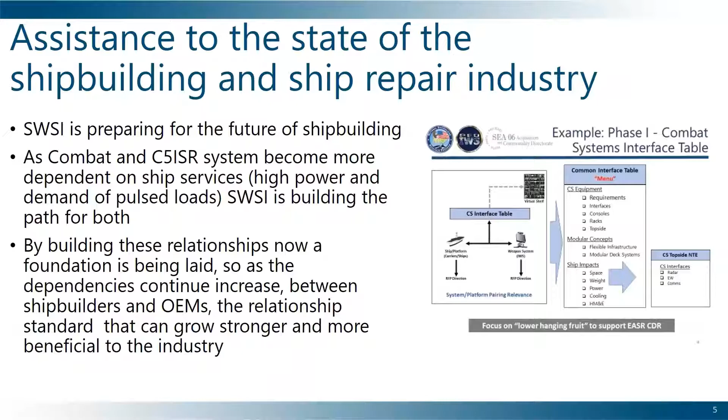So if we can make small changes early in the process that will have big payoff and pay big dividends in the end, that's a win-win for all of us. So we're building these relationships with the OEMs and the shipyards so that as these ties get stronger and the requirements get greater, that we're ready to go and we've created a pathway for this relationship to grow.

Since SWSI was started about 5 years or so, we've completed about 14 projects, and we currently have 3 that are in progress of being completed. The majority of those projects have been focused on physical interfaces. That's one of the challenges we have in shipbuilding: bolt patterns, foundations, and things like that. So we focused on how do we simplify and help lower the cost.

One of the things we've done is help transition technology that was part of the Ford class, and it's currently being installed on LHA and LPD. A lot of that is called flexible infrastructure. A lot of work was done in NSRP to allow that transition to happen.

Currently we're working a project called POA, or Physical Open Architecture, which is looking at a common rack system that is currently installed on the Ford class. We're looking at how we can extend the requirements from what's on the Ford into DDGs and CGs and other surface combatants. That's given us an opportunity to look at how we might be able to use that capability to install it on amphibs.

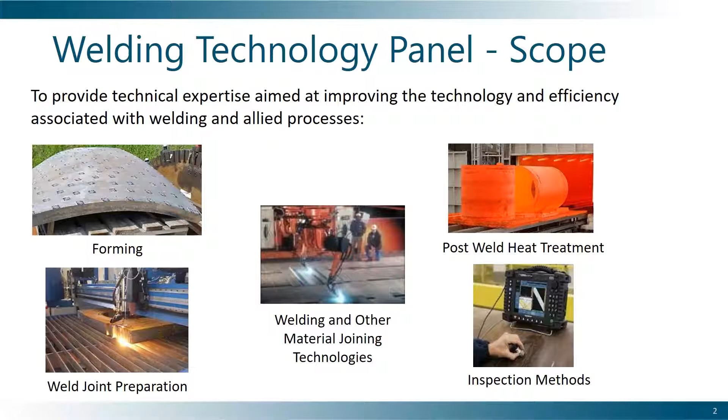When you boil it down to its basics, our mission is to improve welding. Most people, when they think about welding, focus on the actual process itself. But our panel takes a broader view. In addition to the welding process itself, our efforts and interests encompass all of the allied processes, including, but not limited to, those processes that shape and prepare the material, like forming, cutting, and cleaning operations, as well as those processes utilized after the welding is complete, like post-weld heat treatment and inspection methods.

The central focus of our panel is the development, selection, and execution of research and development. However, let me be clear on this point. Our panel consists of welding technical folks involved in building and repairing ships. We are not interested in R&D simply for the sake of R&D. We are looking for projects that have the strong potential to be implemented in our industry.

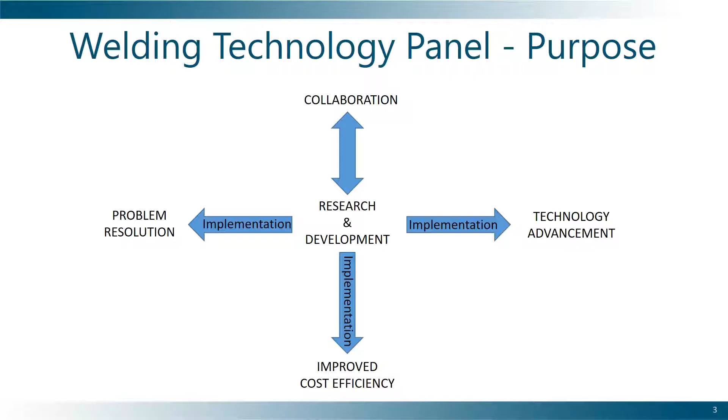The overarching and critically essential tool for accomplishing this is through excellent and frequent collaboration. I am both proud and grateful for the opportunity to work closely with welding subject matter experts from all spectrums of the shipbuilding and repair industry. The forum that the welding panel provides for this collaboration ensures that research and development projects that are identified, developed, selected, and executed are aimed squarely at resolving welding challenges, particularly those that are common to many of us, at advancing the technology of an industry that has a lot of room for exciting growth.

And finally, improving the cost efficiency of a key but expensive manufacturing process for shipbuilding and repair. So how does the work of the welding technology panel benefit the Navy, as well as the shipbuilding and ship repair industry in general? First, I come back to that concept of collaboration. This time, I capitalized, underlined, and bolded it to stress its benefit. While this one is hard to quantify, do not underestimate its value. What other avenue brings together in one place the welding SMEs from across shipbuilding and repair, supporting industries, academia, and the NAVSEA technical community? The Welding Technology Panel provides an excellent forum for collaboration that opens the door for brainstorming and discussing project ideas that address real-world issues that are common among many of us. Collaboration that fosters professional connections and relationships and the exchange of information. Someone we can pick up the phone and call when we have a question or a problem.

The second point I want to make as to how the Welding Technology Panel benefits the Navy is relative to the advancement of technology and implementation. The overall benefits in terms of implementation can't typically be measured one project at a time. That's because advancing the technology of welding is hard. It's challenging and time-consuming. Additionally, the capital investments for implementation are oftentimes significant. That being said, there are numerous welding technologies that are in common use today that we take for granted. But in reality, the Welding Technology Panel played a part in bringing these technologies to fruition.

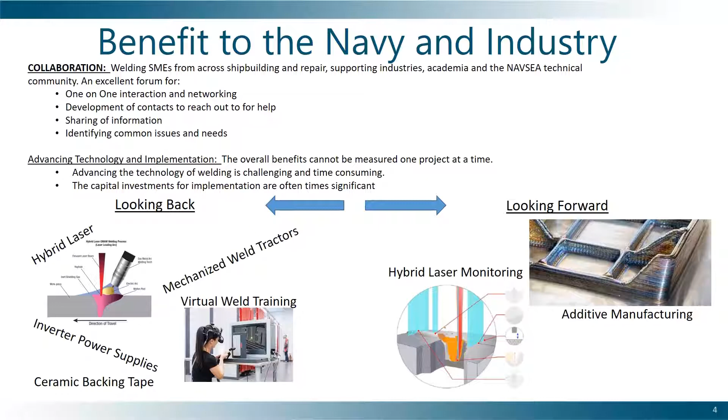For example, we recently completed a project looking at a high deposition welding process for additive manufacturing of large parts. We are also working on a couple of projects on hybrid laser arc welding that will further enhance and expand that technology. Okay, now let's get down to the nitty-gritty of what the Welding Technology Panel has been up to

since we were in Charleston a couple years ago. We completed a project on high deposition robotic additive manufacturing. This project utilized the tandem gas metal arc welding process, which offers maximum productivity, a 2 to 3 time increase in weld speed and deposition rate for building large shapes.

We also completed a project on high penetration dynamic buried arc welding, which is a variation in the GMAW process that results in deeper penetration and enables the completion of a 3/4 inch thick plate in a single pass. This process could realize up to an 80% savings over traditional welding methods.

The third project we completed was the development of a weld sequencing modeling software interface, which simplifies the distortion analysis for large structures and thus enabling the optimization of weld sequencing to minimize distortion. The savings in non-value added labor to correct distortion is estimated at up to 30%.

We are also currently winding down work on 3 other projects. A project on deep penetration hybrid laser, which couples the hybrid laser with the tandem gas metal arc welding process to expand the thickness range of hybrid laser systems up to 1 inch. This obviously increases welding throughput and minimizes distortion.

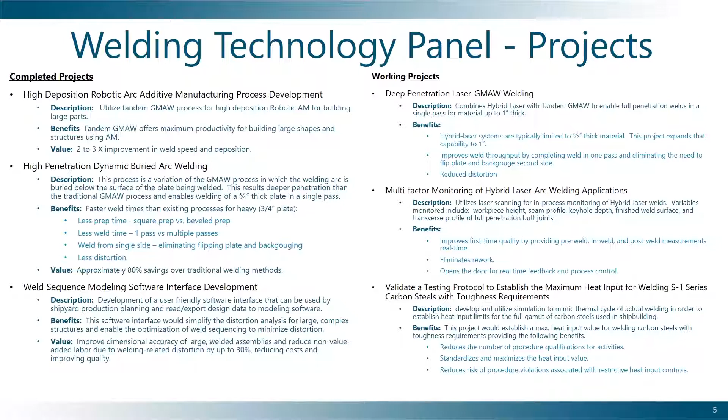Finally, the last project is a testing protocol to establish heat input limits on S1 carbon steels. This project is using a thermomechanical simulator to mimic the thermal cycle of a weld. Using a simulator in lieu of the traditional means of welding test plates significantly shortens the test time and will enable evaluating many grades of carbon steel and develop a maximum allowable heat input. This could eliminate the need for onerous welding procedure qualifications both for the shipyards and their suppliers.

The Welding Technology Panel meets twice a year. Our agenda typically consists of a day and a half of technical presentations, accompanied by a half-day tour. In August of 2019, we had an excellent joint panel meeting with Workforce Development at Lincoln Electric in Cleveland, Ohio. As many members of the welding panel sat in the Indian Stadium one evening that week, eating 25-cent hot dogs and drinking beer, none of us envisioned what 2020 had in store.

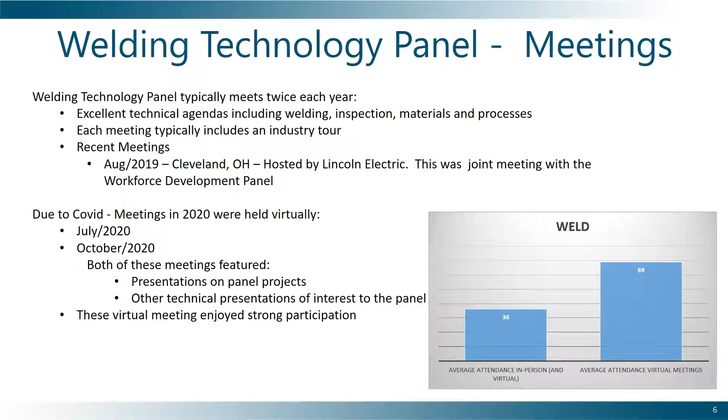As far as future activities are concerned, funding constraints will impact face-to-face meetings. That being said, given how much I've emphasized the importance of collaboration, I've been meeting with my panel leadership to discuss viable options to keep the panel marching forward and interest strong.

Some of the ideas we are considering include continuing to hold virtual meetings. As COVID has taught us in 2020, virtual meetings can be effectively held. We are looking at changing the content of these meetings going forward, focusing on specific topics of interest and crafting an agenda with strong technical presentations in line with that particular topic.

We are also looking at the possibility of holding a face-to-face meeting in the fall at no cost to NSRP. Finally, we plan to encourage panel members to participate in other welding events and conferences. For example, in October of this year, there will be an AWS shipbuilding conference in San Diego. If enough panel members show up, we may be able to have an impromptu meeting, maybe even accompanied with a few cold beers, minus the hot dogs.

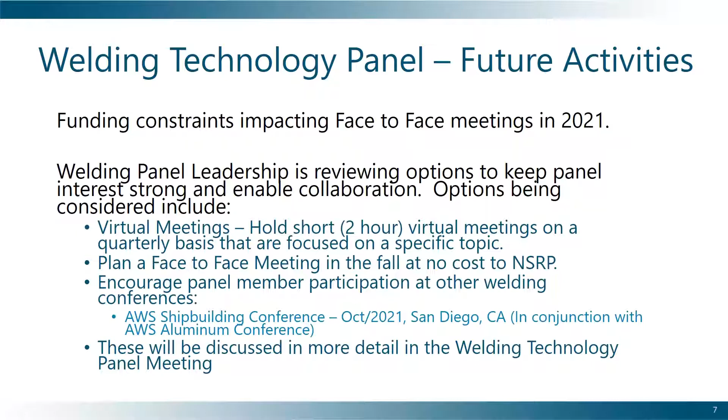These and other ideas will be discussed in more detail in our Welding Technology Panel meeting tomorrow afternoon. This marks the end of my presentation. Thanks for listening, and I would be happy to answer any questions.

Good afternoon. My name is Orsino Chiara Jr., and I have the honor and pleasure of being the Surface Preparation and Coating Panel Chair. Today we're going to run you through a brief update of the state of the panel, and just share with you some of the things we've done, some of the things we plan to do, and where we think we provide value to the overall process.

Surface Preparation and Coating Panel mission: specification to deck plate application, a spec to deck approach. We research, evaluate, develop, and sustain current and emerging technology that will reduce costs and maintain or enhance quality in the areas of construction, maintenance, and overall repairs for shipbuilding.

Some may say, what do you do? Actually, we engage suppliers, applicators, and specifiers of the preservation system. And in that discussion, we also include NSRP, that being the tech warrant holder. Why do we do this? We offer everyone a chance to sit at the table, and I mean everyone, we include everyone.

AMPP, you may not be aware, but maybe you should be. SSPC and NACE merged last April. As a product of that merger, the outcome was AMPP, the Association of Material Protection and Performance, which is a tremendous partner for us in this world we live in. Corrosion Community of Practice, which is also a Navy organization, which we play a particular part in.

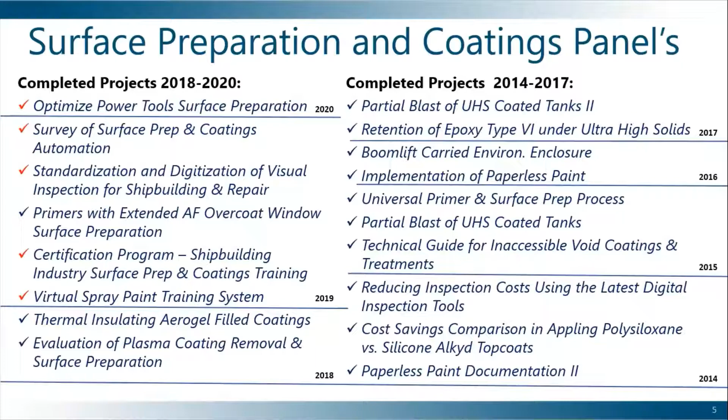A couple of past projects focus on the people. There was a certification program for shipbuilding, going in and saying there is a need to continue to improve the education, knowledge, and welfare of our shipbuilders. That being the case, we want to make sure that we, as an organization, provide some of those tools. We found out over the past few years that, because of limited resources in this arena, as you get qualified and trained people up internally, there becomes competition between the shipyards and the contractors for their services. We want to make sure we have adequate training across the board, or at least have a vehicle in place to improve that for our people.

Some of the benefits would be increased quality performance, improved EH&S - environmental health and safety performance - due to increased coatings knowledge. I tell the environmental organization internal to Newport News that we're their greatest customer because we can create problems for them. But if we continue to improve and grow as an organization, become more knowledgeable, we can also prove to be an asset to them for not having things go wrong, proving that we are part of the big team, part of the overall success factors, and possible cost reduction in a very labor-intensive environment.

Virtual Paint is another project, looking at people. It's interesting - we're doing this project now that we're living in this virtual world. What it does is provide the actual sprayer with the ability to go into a compartment, use this virtual system, and learn how to spray in tight compartments, learn how to spray consistently, and make sure he comes out once and he's done. Then he sits down with the instructor and goes through what he did well, what he didn't do well, and how he can get better.

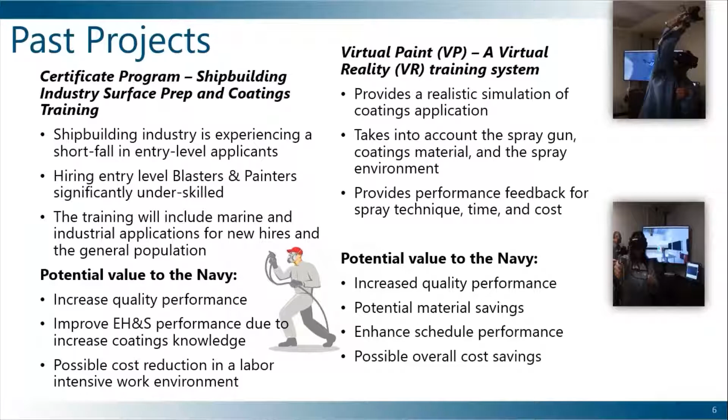Some of the current projects we're doing talk more along the lines of processes. So we say we want to look at people, ensuring they have the resources and tools to do their job, and look at processes. Those two things combined, enhancements in those two areas, will allow us to do better on our performance.

Survey of surface preparation and coatings automation - we've taken an effort to go out and look at what we're doing from an automation standpoint internal to the coatings arena, what we're doing external to the coating arena, and what we can learn from others. Can we go into the automotive world and see what they're doing and try to take advantage of those? Can we close the gap on automation things we're doing internal to the shipyard that may not be coating related, but may be applicable to coating? Obviously, the value to the Navy is a possible cost reduction. Coating is a very labor-intensive environment, and if we can find ways to remove some of those labor-intensive efforts from our people, they will stay healthier, and we'll have a smoother process.

Standardization, digitalization of visual inspection - we capture data electronically, efficiently report data without duplication of efforts, and it has immediate access that is consistent, objective, and clean.

This provides the Navy less touch time, no manual data entry, and increased record accuracy. If you have coatings records, which you have to trace throughout the life of the ship, and you're looking at an aircraft carrier, that may take 7 years. That's a lot of records for a very large vessel, which can create problems with duplicate efforts and potentially even loss of data records.

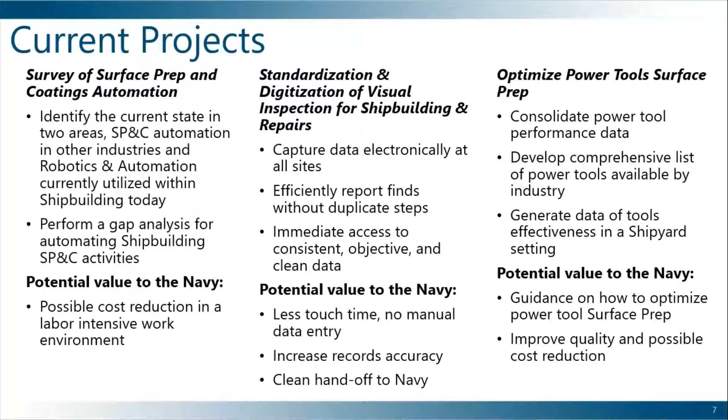One of the things that's gone on over the past few years is seeing how we continue to compete or keep people informed during the pandemic and in the virtual world. We've always had an opportunity to do things virtually, and we've always had some challenges prior to the pandemic. I would tell you now the pandemic has given us an opportunity to be more successful in the virtual world, and the coatings arena is still doing those things with people.

I understand that safety comes first. That is our primary concern. We want to ensure that our people are safe. We do not want to put anyone in harm's way. But when we get to a point, and we may never be the same as we were previously, when we get to a point where it's safe for us to potentially meet face to face, there are certain advantages to that, and we try to take advantage of those things.

The next potential opportunity for that is actually MegaRust, slated to meet in September of this year. It's a face-to-face meeting, but I think they give you the option of virtual as well. It's going to be in the Hampton Roads area, so plenty more to come there. We'll keep you informed as we move forward.

It's tough to give you a total overview of everything we're doing in the coatings arena in only a 10-minute time frame. I'd like to let you know the 3 projects we talked about, our current projects, are slated to be reviewed during our all-panel breakouts. The surface preparation and coating panel breakout session is Thursday morning, starting at 10. It may run a little long. We've got a lot of things to discuss, and that's one of those things, like having your personal time. But we'll do a good job there.

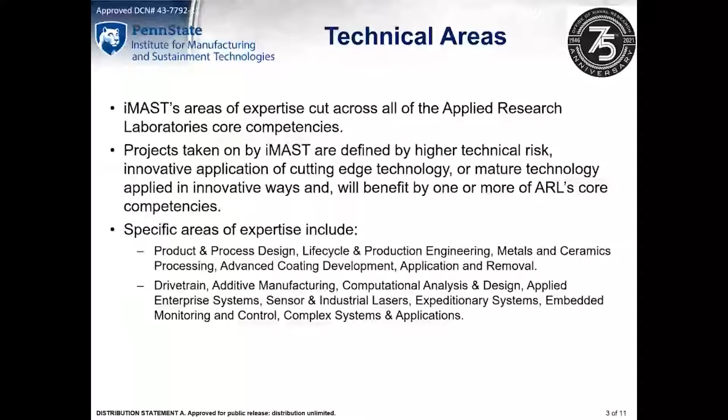I would like to now transition into a description of some of the projects that ARL IMAST has completed successfully over the last couple of years since your last all-panel meeting. The titles in purple that you'll see on these quad charts are projects that are going to be briefed to one of your panel meetings.

The next slide, slide 6, is entitled Sustainment. The top half of that slide, those two projects, are both completed and successfully implemented. The first one, False Deck, was a collaboration with CMTC and working with Bath Iron Works, Newport News, as well as Ingalls to develop and get approved through the formal technical warrant system a new deck material that can replace the old unreliable decking that has been used in some of those spaces.

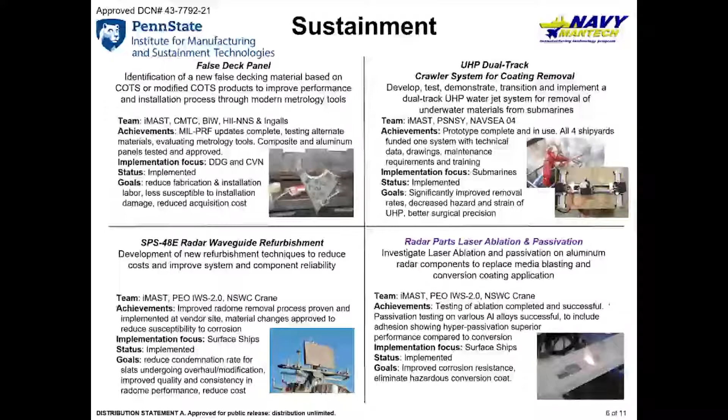Dual Track was a RepTech project we did first with Puget Sound, and upon successful completion of that submarine coating removal project, we helped the other 3 shipyards get systems for their use on submarine coating removal processes.

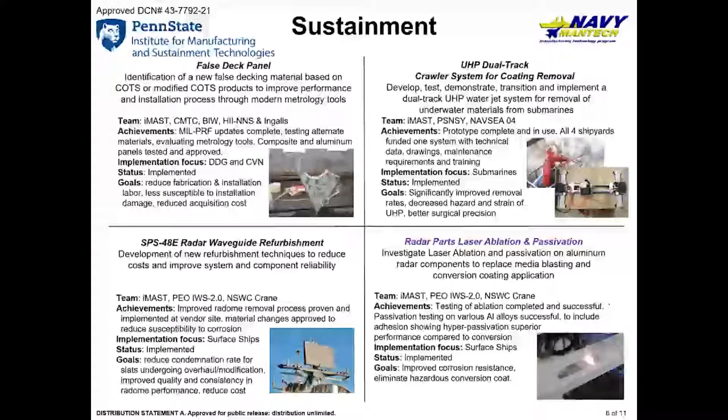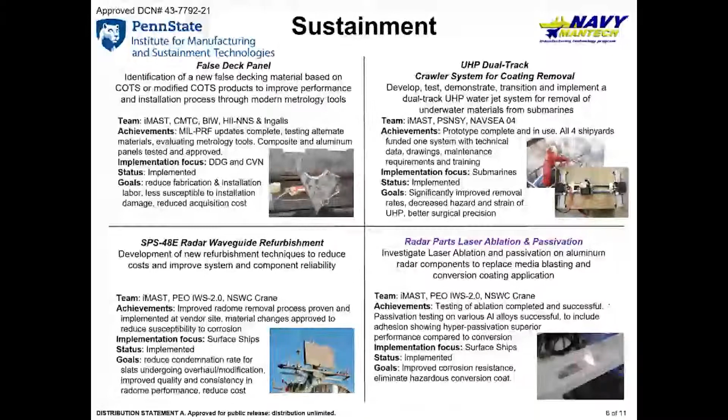The bottom 2 are also RepTech projects in support of IWS Crane. In each of those, we're looking at technologies to help in the overhaul process for those radar slats and to improve their reliability and time on the ship, and new technologies that might improve their sustainability, such as laser ablation for those aluminum slats, and the exploration of passivation as a method to eliminate, at the minimum, the hexavalent chrome being used. Potentially, as this project concludes in the next month, we think we'll see an expansion of that technology to support other structural aluminum being used within the Navy.

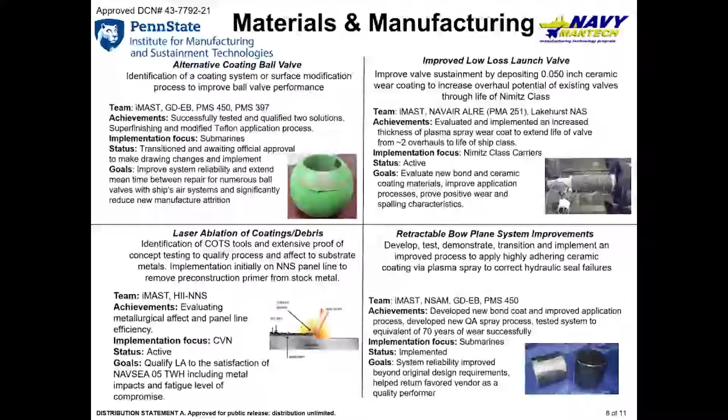On slide 8, under materials and manufacturing, 2 projects are completed and 2 are still active. The ball valve project was completed this past summer and is in the process of being approved by the technical warrant community, as well as changes to drawings made between Electric Boat and PMS 450. That project is complete and successful, with the outcome being 2 new coatings that will significantly reduce the incidence of new manufacturer rejection of those ball valve balls.

The improved low-loss launch valve, in support of NavAir and Lakehurst and the carrier program's launch equipment, is using a new technology to expand the thickness of the bond coat and wear coat that, when failed, creates a catastrophic failure of the launch system and a shutdown of that catapult.

Laser ablation of coating debris is back up and running in the very near future, and we'll be using that project not only to improve panel line efficiency and reduce the incidence of hazard to the workers there, but also to expand the applications of laser ablation in shipbuilding and ship maintenance.

And finally, the retractable bow plane project ended a couple years ago, but we've expanded the applications now to include both the Virginia-class program and the Seawolf program.

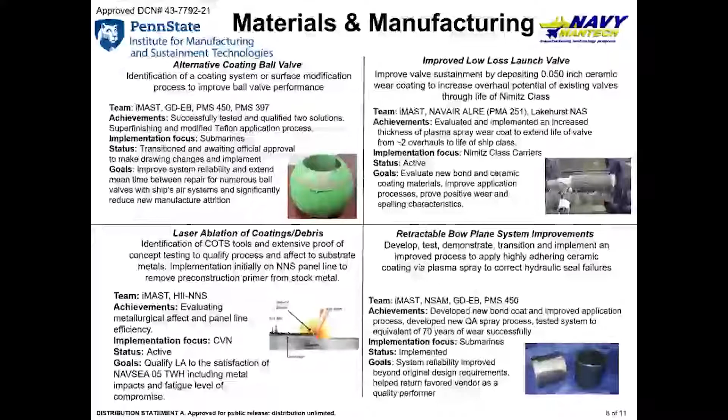On slide 9, under metals, you'll be getting a briefing later on portable hatchable cold spray, actually an update on the state of transition of cold spray technology in general, in support of both new manufacture and sustainment. This project, successfully completed last spring, is going to provide the opportunity for you to take cold spray to the part in situ within the ship.

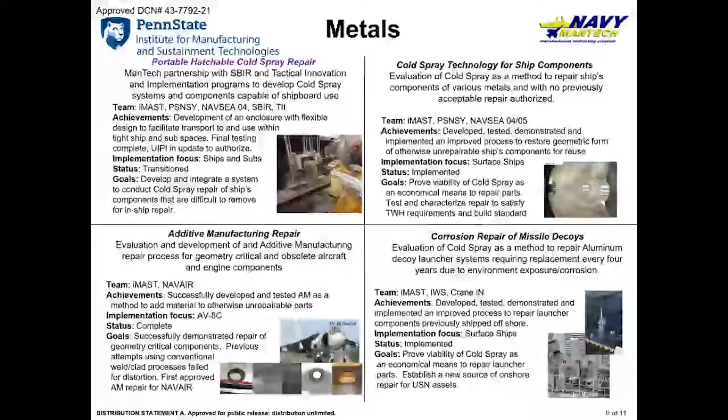This is as opposed to the current state, which requires cutting out that material or component and delivering it to the shop for repair. The other two projects on the right are both concluded cold spray projects we did in support of NAVSEA and IWS. I might add that as a result of those two projects, we now see the application or implementation of cold spray across the entire Navy sustainment enterprise, Marine Corps, NAVAIR, and NAVSEA.

And finally, I think you're all aware that ARL is a giant in the additive manufacturing world. In this project in the bottom left, we are using additive manufacturing as a capability to repair components that are currently obsolete in support of the AV8.

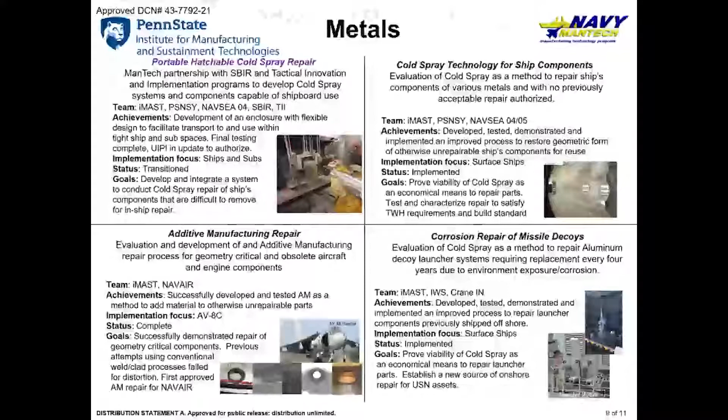And of late, this includes both ship maintenance at Puget Sound and the submarine factory, as well as Albany Marine Corps base, supporting the Marine Corps depot there.

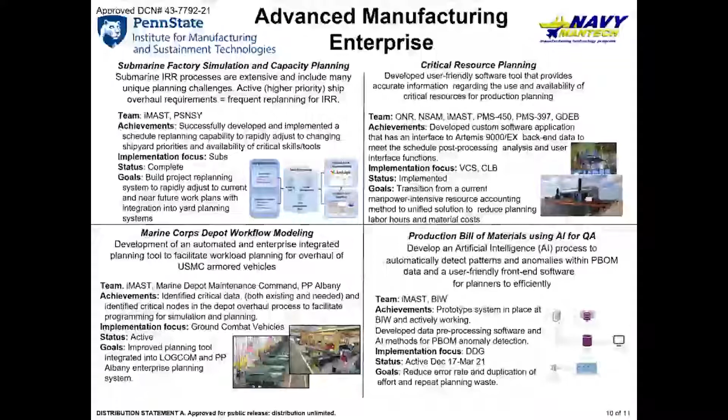PBOM on the bottom right is the first use of AI that will be implemented. It is being implemented at Bath Iron Works very successfully, and that project will be concluding here next month. We'll give a follow-up report on its success at a future date of your convenience.

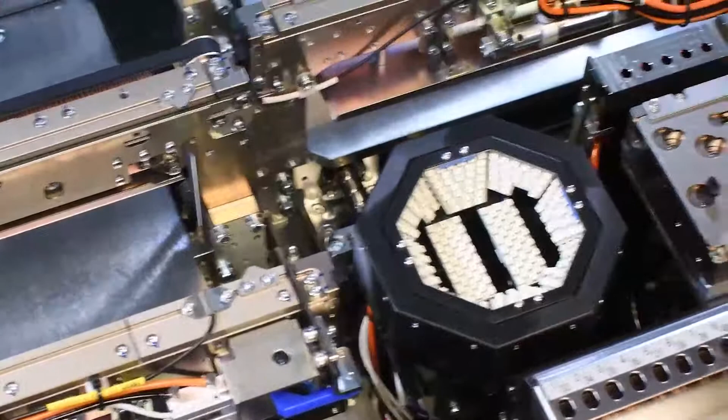We do an awful lot of low-cost based, high-throughput manufacturing. We have a full-fledged support element on our manufacturing shop floor that allows us not only to do prototyping for electronics, but also rate-based manufacturing to support electronics work for DoD concerns as well.

We're involved in a variety of other areas. Thermal management is one I would really like to highlight because almost every project that we execute for Navy or DoD has some element of thermal management associated with it. And this is particularly true when you're getting up into your higher power and higher frequency applications, which we're seeing more and more of for Navy surface combatants, for instance.

Micro electromechanical systems, very sophisticated systems for sensors the size of a postage stamp or smaller. We're involved in energy storage. We have significant expertise in battery storage devices, and we're working those actively for the Navy right now.

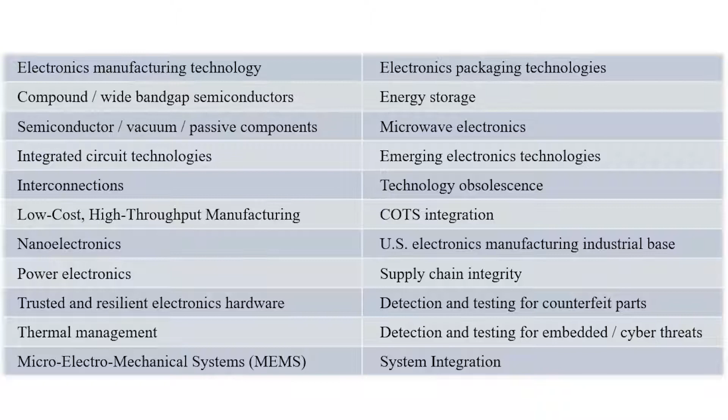Microwave, COTS integration, open architecture. One of the things that I'm particularly proud that we're involved in, and it's somewhat novel, is supply chain integrity. As you look down at the vendors that support your supply chain, what we're able to do is make a very detailed assessment of that supply chain and find ways to mitigate risk and bolster the supply chain to maintain a robust structure over the life of a particular project, including an awful lot of detection for counterfeit parts, which is particularly topical right now in our industry.

And of course, at the end of the day, a lot of what we do boils down to system engineering. So not only do we have very specific expertise in particular technologies, we also have a much more system or holistic based view of how those technologies are brought together and ultimately fashioned into something that can be utilized by the warfighter.

So what do we actually do here? We've talked about the technology domains that we're involved in. What do we actually do that's actionable in terms of project execution?

I would say probably first and foremost, what we do is apply our expertise toward electronic packaging. A great number of the circuit boards that we design, innovate, or augment have to be packaged in such a way to withstand a very hostile end-use environment. And so a lot of our expertise goes to that regardless of what the end use is going to be.

We're also very proficient and do an awful lot of work in design engineering across the three major areas of electrical engineering, which are radio frequency, analog, and of course digital. People are sometimes surprised at the amount of material science that goes into what we do. It's not just a cadre of electrical engineers — we also have significant expertise in engineering materials, because material science is really one of the major things driving our particular technology envelope. Power electronics and semiconductors, of course, particularly those supporting higher frequency applications.

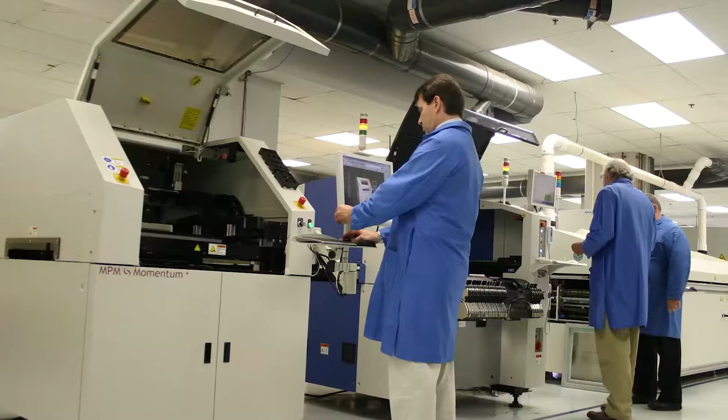And last but certainly not least, we provide a full array of training capabilities and services across the board at the technician level, operator level, engineering level, and even at the manager leadership level. So anywhere from a single operator on a particular shop floor function all the way up to somebody who's going to be presiding over and managing an entire electronic manufacturing facility. We also do quite a bit of custom manufacturing training for our end-use customers, both in industries such as the Lockheeds and Raytheons, as well as our government customers, which would include certainly the Navy and the Army as well.

Our key staff members: Alan Criswell is the president of the company. He stood the company up in 1992. He is a former ONR program officer himself for ManTech. The company was basically developed with the premise of bridging the gap between technology developed in the laboratory and actually getting that technology fielded across the Valley of Death. We've been working that same mission for ManTech now for almost 30 years.

Dave Hughes is our ACI Director of Finances and Contracts. I am the Director of the actual EMPF Center of Excellence. Carmine Miola is our Technical Director, who is very capable with almost 40 years of experience. And if you look at our talent pool, it's not just electrical engineers, it's a wide cross-section of cross-disciplinary expertise, starting with electronics and electrical engineers, but also including applied physics, mechanical engineering, manufacturing specialists, and material scientists. So collectively, it's a very broad area, much broader than just electrical engineering itself.

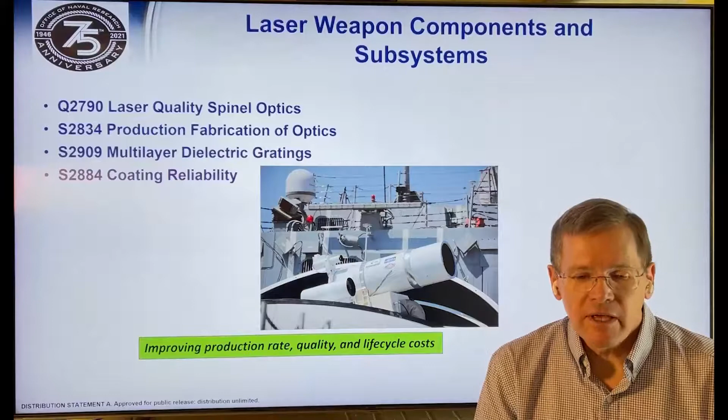The next project I'll talk about is fiber optic links and testing - this is test adapter efficiency improvement. It goes in line with the ILTS, or Integrated Link Test System, and will be presented in depth at the electrical panel session. Check out John Mazurowski and Jason Farmer for more details.

We took on being able to measure not just the fiber optic links, but the electrical links, RF, and the fiber optics, putting that all in one box with many different types of adapters in order to switch out. We ended up using 3D printing for that.

The next project I have is moving more toward electro-optics as a tool for manufacturing, rather than manufacturing of electro-optics. The first one here is tank inspection using drones.

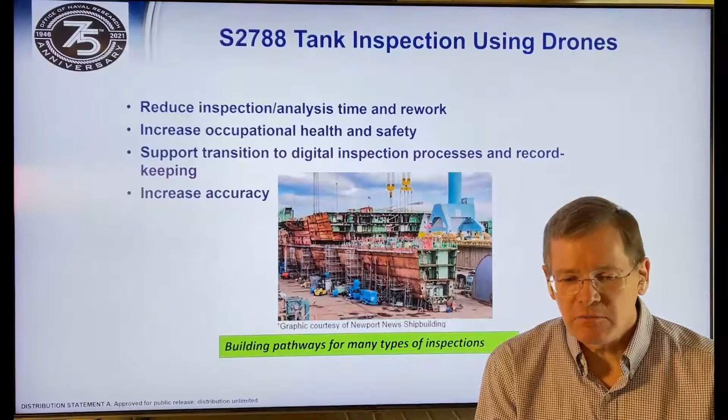The last project I have is automated metrology for structural assembly, also a very challenging project. In this one, we're putting together large ship sections - they might be 40 or 50 feet long.

Think of it as a single deck system. The picture I have has partial outfitting in it, but you get the idea. If we have to measure something like that over a very large section and determine whether it's ready for joining, we want the ease of not having a surveyor crew come in to do a bunch of measurements, or a person pan through all those measurements to see whether they're ready to weld or not.

Very challenging to make that a totally automated process. At the end of this project, we hope to have a heat map of deviations from a large standoff distance, and if the standoff distance is too long, we can adjust the setup. We can do this job with very few setups, either with laser scanners or laser trackers - I can almost give you a spoiler alert, it won't be LiDAR.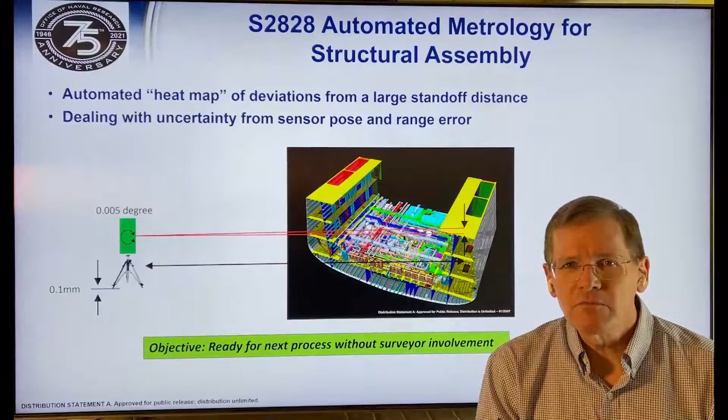Photogrammetry looks very promising in this case. But looking at the number of setups, the obliqueness of the angle of what you're measuring creates a lot of range error, and just very slight perturbations in the pose of the sensor you're using can cause those kinds of deviations. We think this is a very valuable piece of research and hope we can get considerable cost savings out of it.

So I hope you've had a chance to see the kinds of different projects we've been involved with in the Electro-Optics Center. If you want to learn more, drop me an email, check out our website, and I hope to talk to you about future challenges using electro-optics. Thank you.

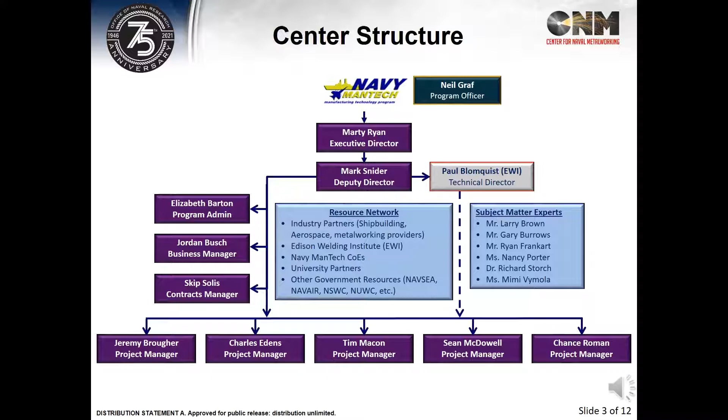Our resource network of industry partners, DoD shipbuilding and aerospace OEMs, university partners, and technology providers are at the center of the organization. As previously mentioned, employing a virtual model allows us to reach out to the U.S. industrial base to formulate teams best suited to meet the Navy's manufacturing challenges on a project-by-project basis.

As a result of our proven COE structure, strong partnership with platform OEMs, and collaboration with key program offices, we're currently projecting over $430 million in Navy cost savings just on our completed and active projects, which we anticipate will grow significantly as we account for savings from additional projects in development.

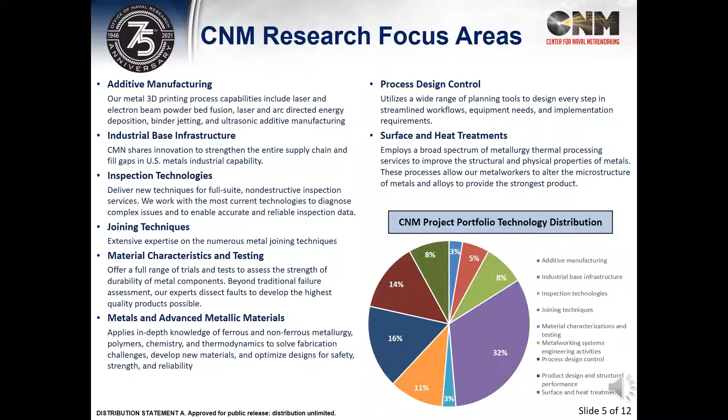Now I'd like to highlight a few of our completed and ongoing projects. The first is optimal methods for installing machinery foundations on surface ships, a completed project with Ingalls Shipbuilding to develop more efficient and cost-effective methodologies across fabrication, outfitting, and shipboard integration of machinery foundations. The resulting methodologies have been implemented on LHAs and LPD ships and are currently being phased into DDG construction at the Ingalls facility in Pascagoula, Mississippi, culminating in total savings of $830K over 5 years.

The next project, Automated Pipe Fitting Scriber with Bath Iron Works and EWI, is focused on developing an automated pipe fitting scribing unit to replace the manual methods currently employed at the shipyards. There are thousands of welded pipe joints across multiple systems and sizes on any given class of ship. To meet build specification, a scribe line at a specified distance is required for each pipe joint intersection. Currently, BIW primarily uses a white heat-resistant pencil to manually mark the fittings. While adequate, it has limitations on resiliency, and the marks are easily removed during pre- and post-weld cleaning.

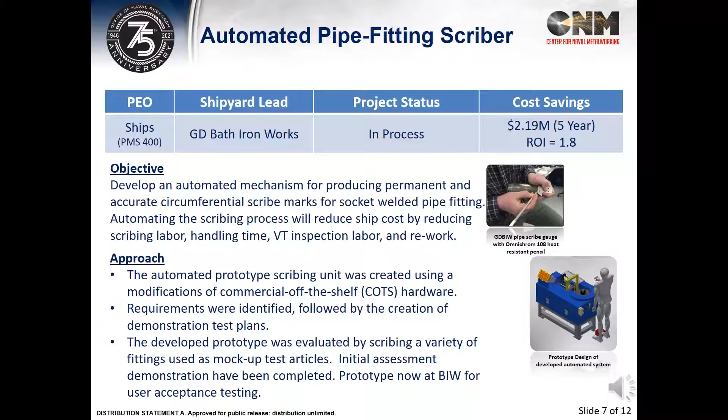The Newport News Shipbuilding Foundry Casting Improvement Project, currently ongoing, is working to investigate and implement a method to protect the molten metal as it flows from the ladle into the mold.

Previous investigations at Newport News have found that the majority of the defects they see in their foundry are at the surface or slightly subsurface location, which are primarily ceramic oxide related, per research conducted by the Steel Founders Society of America.

The principal approach the team is taking is to develop a shroud and tundish design to isolate the molten metal. The team will leverage expertise at the University of Iowa and ESI to develop simulations and to design and optimize the shroud and tundish.

Test castings with the current methodology will then be compared against the optimized shroud and tundish design to determine the reduction in defects and quality of the pour, which is predicted to save $6.5 million over a 5-year period.

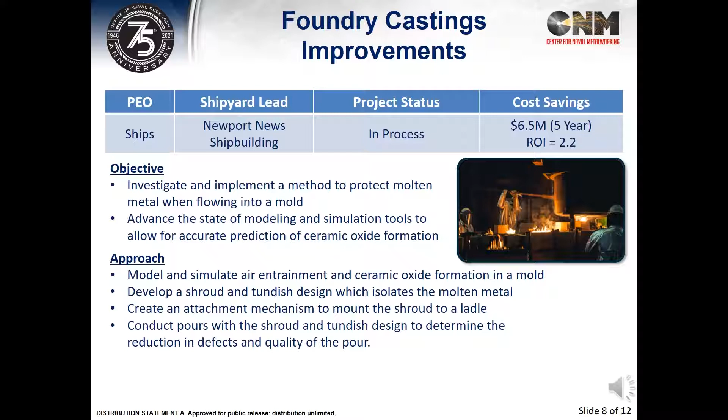The next project I'd like to highlight is the portable welding robot project at Electric Boat. The project team also includes EWI and recently identified ARC Specialties as the robotic integrator.

The project is focused on developing a mobile robotic welding system that can be easily moved throughout the fabrication facilities versus bringing large submarine assemblies to a stationary welding cell or system. The project anticipates providing nearly $10 million in cost savings over a 5-year period.

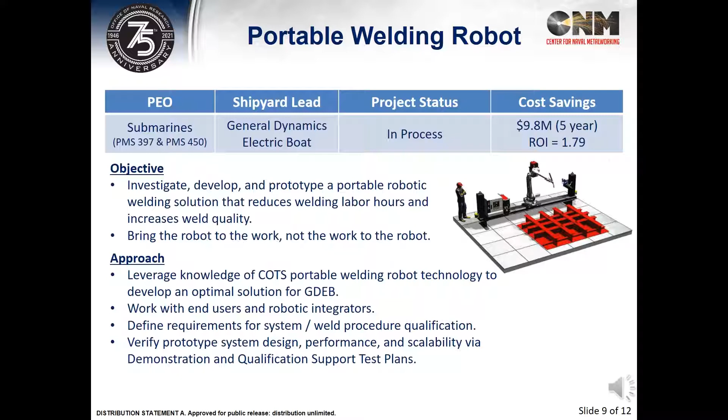The shaped plate automation project at Ingalls Shipbuilding aims to reduce the manual labor required in shaping and verifying shell plates through automated processes. The current process is very labor intensive and requires a highly trained workforce, as you can see from the images on the right.

The team, which includes EWI, CTC, and ARC Specialties, is investigating the optimal software and hardware systems to automate the plate shaping and verification, developing a prototype system to evaluate, as well as a prototype pin jig fixture and verification methods for positioning shell plates.

When successful, the results will be a dramatic advancement over the current techniques, culminating in over $9 million in savings over a 5-year period.

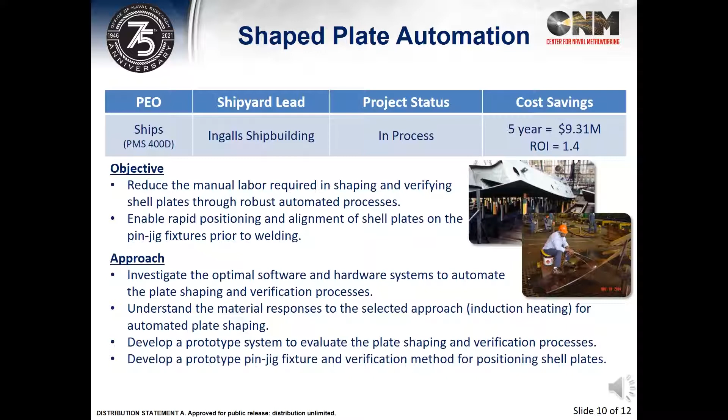I hope that the select projects highlighted today give you a flavor for the type of projects and technologies we're focused on at CNM, with the ultimate objective of reducing material acquisition, maintenance, and repair cost of current and future Navy platforms.

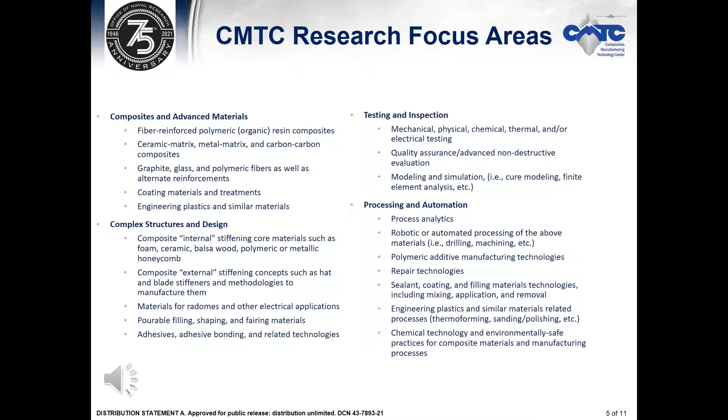Manufacturing for submarines offers a unique challenge, but also an ideal environment to make elegant use of the benefits a composite system offers. Nearly all systems have a doubly curved shape, which are more expensive to fabricate out of steel and less repeatable than molding a composite.

Additionally, most everything spends its life below the waterline in a corrosive environment where steel requires frequent painting, repair, or replacement. Composites can last the life of the ship without the need to even paint.

CMTC coordinated with NAVSEA CL Cost Reduction Program and later the VPM Expansion Program to implement a variety of individual pieces on the sail, which we then leveraged, with lessons learned, to the VPM topside structure.

We have saved over $200 million for the VCS program in lifecycle and acquisition costs. Additionally, those lessons learned were leveraged forward to the Columbia-class submarine during the design phase, which is the best time to consider composite materials and systems.

The Nulka Decoy composite canister is an example of a Mantech project that impacts multiple ship platforms and incorporates a multi-purpose system, including static corrosion resistance to saltwater environments and EMI shielding to protect the decoy.

The project team had to interface with the existing system design by maintaining the form, fit, and function for all platforms. The technology had to be applicable for both new and retrofit canisters, and they had to improve the reliability, life cycle duration, and cost of the canister.

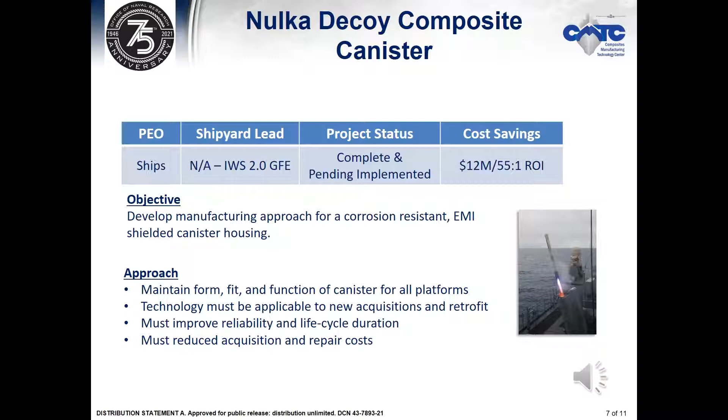The false deck project leveraged early Mantech work that improved the processing of fire, smoke, and toxicity-safe materials, and an early NSRP project that investigated processing improvements to the false deck system.

The legacy system had a very iterative and artisan-based installation approach that was quite lengthy and costly.

The initial steps taken in this project aligned the disparate designs used on carriers and other surface ships to one requirement set that would work on all surface ships.

That alignment enabled a single system that costs less, is easier to install, and will result in less failures in service. The project saved $6.4 million and improved the safety for our warfighters through better system protections and reduced tripping hazards.

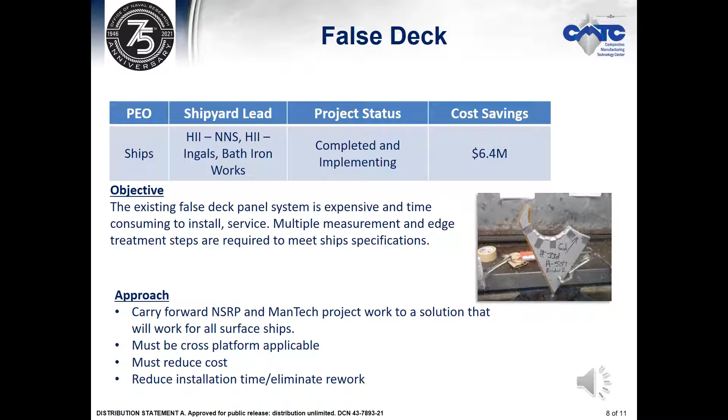This last project set is an example of CMTC focusing multiple projects around a similar material solution.

CMTC has successfully demonstrated that steel-ready service locker sun shields can be replaced with more rugged and longer-lasting thermoplastic materials. That project will save approximately 8,000 hours of maintenance labor per year.

The lessons learned on the Sunshields project are being carried forward to the stowage boxes and drip pans effort. You can see the differences in corrosion resistance of a composite box to a steel box in the lower right picture. We are taking NSWCCD lab scale developments and industrializing them to benefit all surface ships.

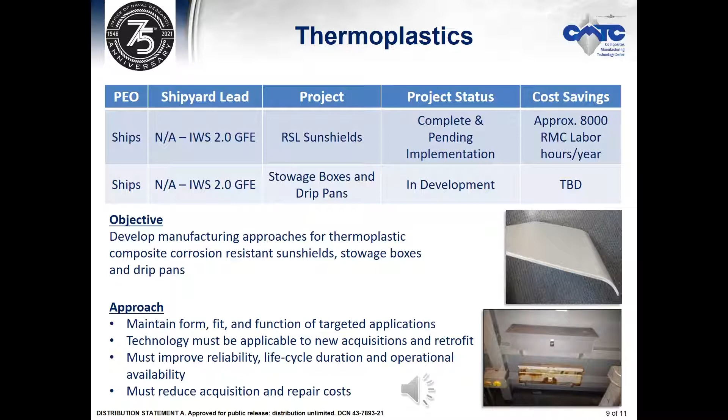By pulling out the results highlighted by the previous successful Mantech projects, you can focus your efforts on areas of the ships where composites can make the largest impact. Items that are below the waterline or otherwise failing from corrosion make excellent targets.

Additionally, if items are failing from other performance issues such as vibration, mitigating materials can be included inside of the composite system. Items that are curved, or better yet doubly curved, will be less expensive and more repeatable if they are manufactured from composite materials.

If something requires high amounts of touch labor, composites, and particularly thermoplastics, lend themselves to automation. Things that impact multiple platforms or weapon systems are also great targets due to the scale of manufacturing.

If a steel access door is too heavy for personnel lift, resulting in rigging for routine removal, you should consider a composite solution that will reduce the weight to a single or double person lift.

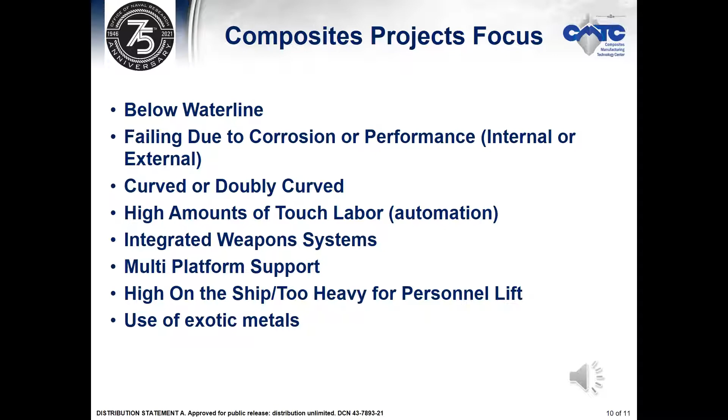Lastly, if a product uses exotic materials for unique properties, there might also be a composite solution that can eliminate or reduce the amount of exotic materials needed with a hybrid solution.

Thank you, and I hope this presentation has given you a better understanding of how composite materials can best be used for ship applications. If you have any questions or great project ideas, please reach out to Nick, Ryan, or myself, or check out our website for other ways to connect.

Hi, I'm Bobby Mashburn, and I'm the Deputy Director for the Naval Shipbuilding and Advanced Manufacturing Center of Excellence, referred to as the NSAM Center. I'll be discussing the NSAM Center over the next few slides and sharing a little bit about who we are and what we do.

The NSAM mission is to identify, develop, and deploy advanced manufacturing technologies that will reduce the cost, time to build or repair, and/or increase performance of key Navy platforms.

NSAM uses what's referred to as a virtual Center of Excellence model to identify, develop, and execute high-quality process improvement projects. With the virtual COE model, we leverage an extensive network of thousands of industry technology providers and academic institutions to assemble the best team for each unique opportunity.

This approach has proven to be successful in identifying significant issues and developing innovative solutions to address those issues. Some of the key aspects of the virtual COE model include teaming with industry experts and the best technology providers, identifying, developing, and executing comprehensive research and development efforts to address critical needs in construction and repair of key Navy platforms, and creating project development, review, and execution teams as needed.

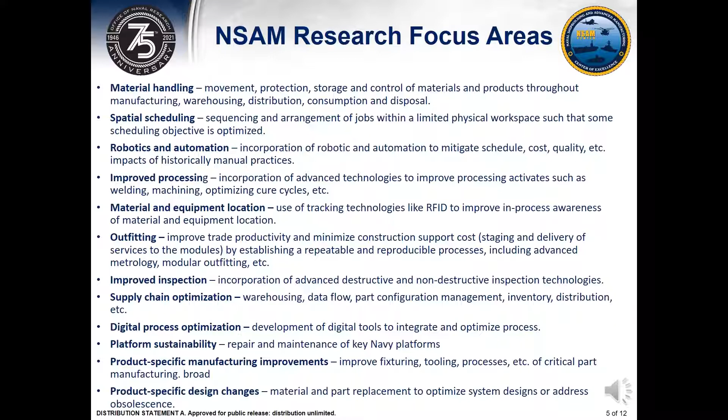The first NSAM project we'll review is titled Digital Data for Next-Generation Measurement and Location Tools. This project is a multi-platform effort with applicability to both Virginia and Columbia-class submarine programs, as well as the DDG-51 program. This project was conducted with both General Dynamics Bath Iron Works and General Dynamics Electric Boat. The objective of this effort is to improve the processes used to locate and install paint masking and hanger studs through the development of a mobile optical projection device and supporting software to receive and process CAD data and associated product data. The approach used by this effort is the development of a location and work sequencing query software, design and development of a mobile optical projection device and supporting software, integration of query data with the mobile optical projection and other location systems, and validation of system accuracy and repeatability.

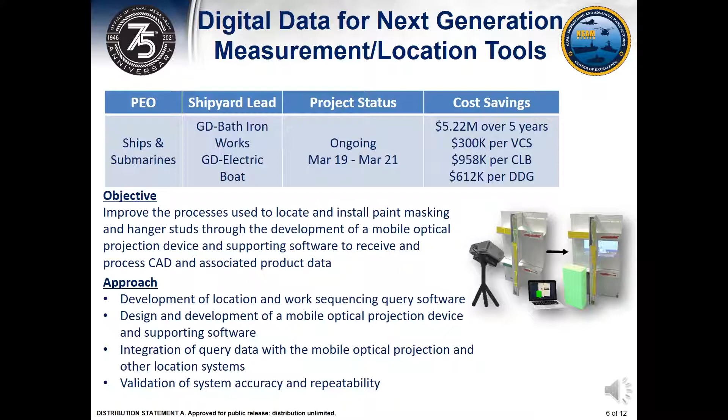This project is ongoing and expected to wrap up in March 2021. With applicability to 3 key Navy platforms, it's projected to save over $5 million in the first 5 years following implementation.

The next NSAM project is titled Advanced Drilling and Electronic Parameter Transfer, referred to as the ADEPT project. This is an F-35 focused effort conducted with Lockheed Martin. The objective of this project is the integration of electronic data transfer technologies with automated feed drilling to optimize and automate drilling sequences for varying material stack-ups and hole diameters. The approach used throughout this effort has included advanced drilling technology market investigations, electronic parameter data transfer development, system development and integration, and prototype testing and analysis.

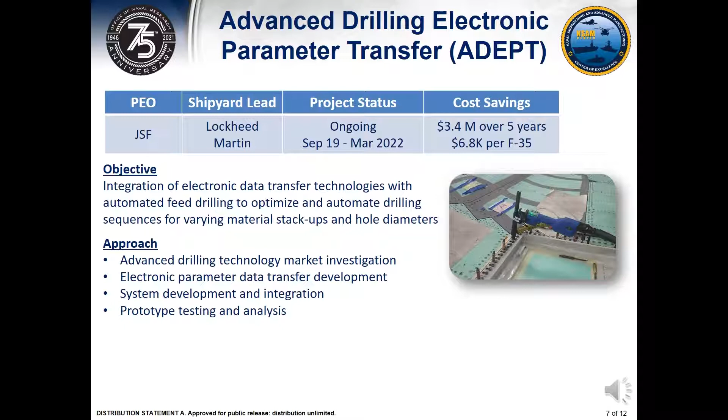This is an ongoing project that's projected to wrap up in March 2022. The projected savings are $6,800 per F-35, resulting in a total savings over 5 years of $3.4 million.

The next NSAM project we'll discuss is titled Automated Part Detail Extraction. This is a DDG-51 focused effort conducted with Ingalls Shipbuilding. The objective of this project is to minimize the labor required to manually edit part details coming from ShipConstructor through the development of a mechanism that automatically dimensions, labels, and supplements parts based on the identified standards from engineering data. The approach used includes examining standards required from producing detailed drawings for fabrication, identifying candidate elements that can be electronically extracted in the enterprise toolset, developing a system to automate detail extraction and validation through end-user testing. This project concluded in mid-2017 and has since been implemented.

The projected savings from this is $503,000 per DDG, resulting in $2.5 million over 5 years.

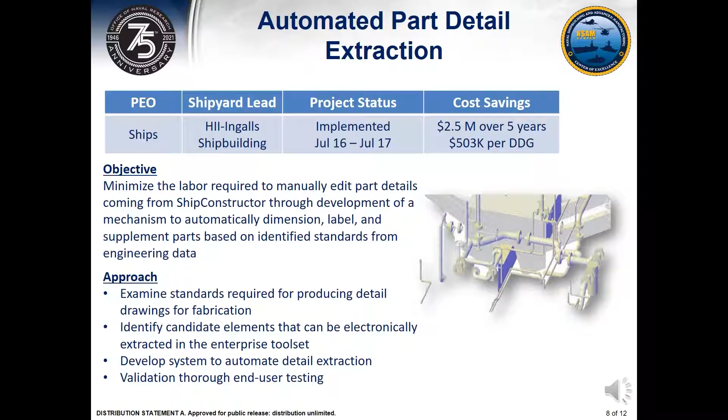The next NSAM project we'll discuss is the Digital Thread Shipbuilder Supplier Interface. It's a CVN-focused project conducted with Newport News Shipbuilding. The objective of the project is to improve the material procurement process by extending the digital thread to the shipbuilding supply base and improving first-time quality, cycle times, schedule performance, and supplier readiness. The approach for the effort included the development of 3 key elements: simplified technical data packages that provided suppliers with clear, concise requirements specific to the material being purchased; 3D design disclosures, which provided suppliers 3D packages that clearly convey design intent and support requirements; and a secure exchange medium, which established a secure method of two-way data transfer between the shipyard and suppliers.

This project, concluded in June 2020, is in the process of implementing and is expected to save $6.8 million per CVN.

The next NSAM project we'll discuss is titled Hybrid Laser Arc Welding, Process Verification and Implementation for Ship Production. This is a multi-platform applicability effort that was conducted with Ingalls Shipbuilding. The objective of the project was to develop process parameters and conditions for single-sided hybrid laser arc welding, or HLAW butt welds, for various types and thicknesses of steel. HLAW reduces the welding heat input used to join metals, minimizing distortion and reducing rework costs. The approach for this effort included the development and evaluation of process parameters for single-sided HLAW butt welds for thicknesses and material combinations defined in the NAVSEA approved process qualification plan, and the execution of testing that the Navy requires for characterizing performance in sea state operational loading conditions and mission capabilities.

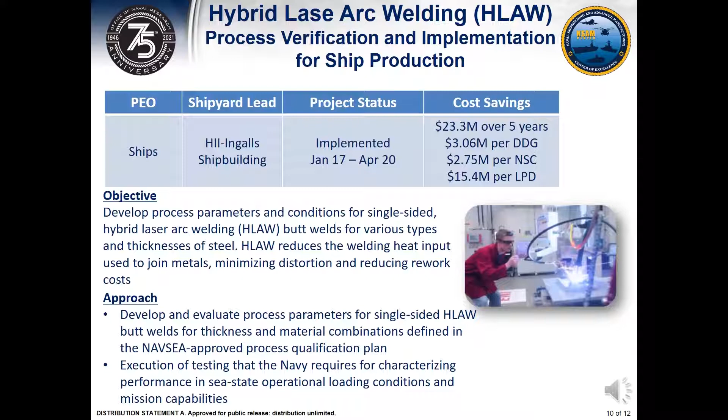As previously stated, the NCM mission of identifying, developing, and deploying advanced manufacturing technologies enables a full range of technology development initiatives, including product and process-focused efforts, material development and use, logistics and supply chain projects, IT and admin tools and tracking elements, and advanced manufacturing enterprise projects. We focus on technologies that advance manufacturing processes. We're open to all types of industrial areas, including in the office, in the lab, work cells, on the shop floor, or in platform fabrication.

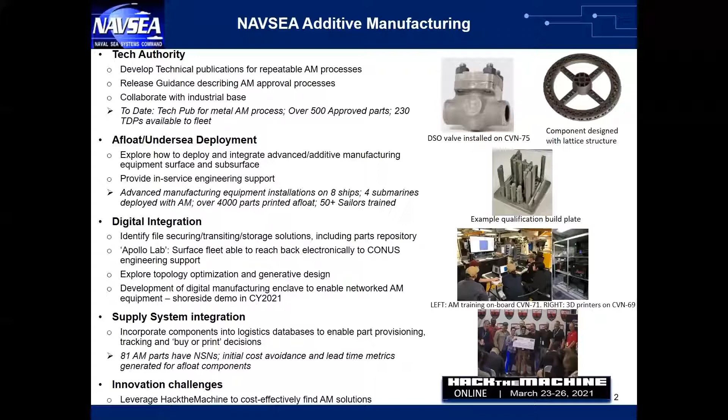The tech authority products, this is my main swim lane as the tech warrant holder. I'm supposed to establish the guidelines and standards for implementing and utilizing the technology, and allowing components manufactured that way to be installed shipboard. So the way we're doing this is we released guidance late 2018. We're currently revising it, but this provides the guidelines for how you get additively manufactured components shipboard, what the approval chain is, what the reporting chain is, as well as what materials in terms of polymer are allowed to be shipboard.

This also develops kind of a box, without calling it out specifically. If you look on the right, how do we assess the components? Your yellow boxes are the areas where we're triaging and working through. Green boxes are those low critical parts that, if they fail 100% of the time, it's not the end of the world.

Those can be plastic or metal, but most likely plastic—things like your knobs, switches, components or pieces that are below the lowest replaceable unit. So the button on your remote control, for example.

Then your blue boxes—those are the components that have a structural requirement or a material requirement, or need some pedigree of background data or manufacturing process to really make sure that component will hold up under the requirements of the part.

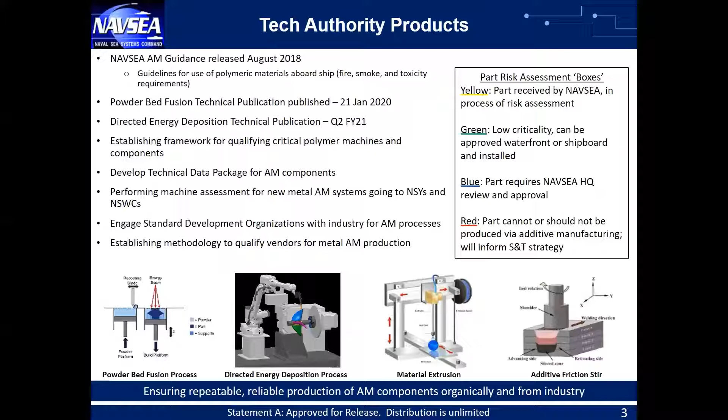So the specs and standards help bound how we manufacture the parts. One of the big efforts under our R&D program is how do we start pushing the technology to the warfighters, to the expeditionary ranges, whether it be afloat or forward deployed.

As I mentioned before, we have a good understanding of how these machines perform in a lab environment. But what happens when you start putting it on platforms that have dynamic situations around them, whether it be sea states, wave slap, or just the vibration of being on the ship itself? What effects did those have, as well as environmental factors like temperature swings and humidity swings—what kind of effects does this have on the machines themselves?

Over the past few years, we've been working on polymer, installing equipment on about 8 different ships thus far, to get a good understanding of the effects, what kind of use cases come from this when the sailors have this equipment shipboard, and what kind of lessons learned we find when we start integrating. We've worked through the polymer, with still some things we're learning and working with.

Next step is metal AM—what does it take to integrate metal capability shipboard? That's part of the overarching R&D project we're working towards, along with what it takes to establish a program of record for additive manufacturing. Right now we're an R&D program, but as this equipment starts getting installed shipboard, what is the logistics tail required to enable us to support this equipment once it gets into the sailor's hands, and they need material for feedstock, or repair parts, or just overarching support for the machinery.

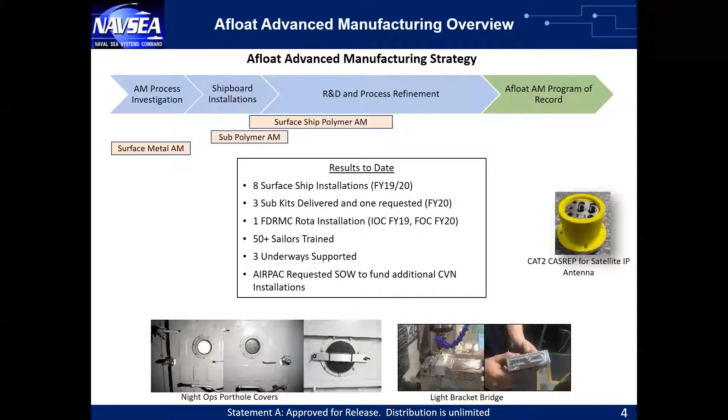So when we talk about the different capabilities that we're putting shipboard, we've established in the polymer realm tiers, where your tier 1s are your desktop printers, call it kind of your higher grade hobby printers. These can do your low risk, low critical parts. It comes with the equipment you need to run it, and you can do kind of low grade materials.

Your PETGs, your ABSs, nylons if required. The next tier is tier 2, where we start pushing more towards industrial polymer. These are the ones that can start going towards those critical polymer applications and tie into that technical publication I talked about that we're looking to develop for critical polymers, as well as opening up the aperture on what materials we're going to be able to use. So those are your Ultems, your PEEKs, your PEKKs, your carbon fiber infused materials—the ones that can actually start taking a good structural load. Also increasing the fire, smoke, toxicity considerations, which is a big part for getting additive material shipboard.

So these were established based on lessons learned that we'd had over the past few years of ship installs. A big component of these is making sure that all of this kind of equipment can actually be brought onto the ship without cutting a hole in anything. So hatchability is also a very big important player in this equipment selection.

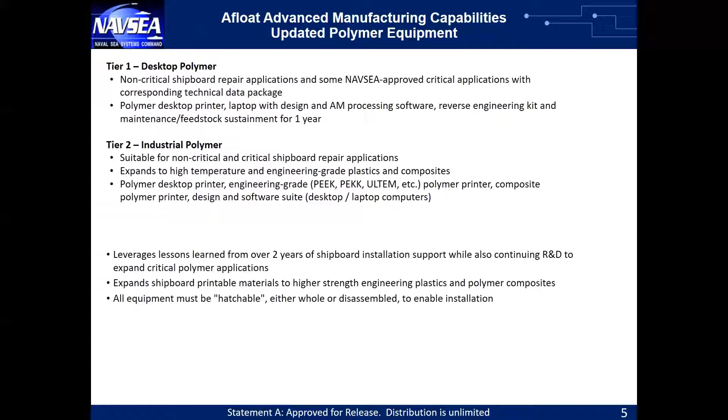So when I talk logistics integration, at the beginning of 2019 we stood up an AM logistics integration team to help us start identifying and figuring out how do we get additive parts into our supply system. What does it take? What kind of vignettes or challenges do we have? It can be a make solution or a buy solution.

So the part can be either manufactured additively or bought through the supply system and procured locally. Do you just make it at point of need and not worry about the supply system? And what are the different kinds of challenges that we have run into with this?

Also, what kind of part numbers do we assign to these? Do we assign NSN numbers to the additive parts? If so, how do we do it? And then how do we start getting it into provisioning and really locking into all the different logistical things that integrate into our supply chain?

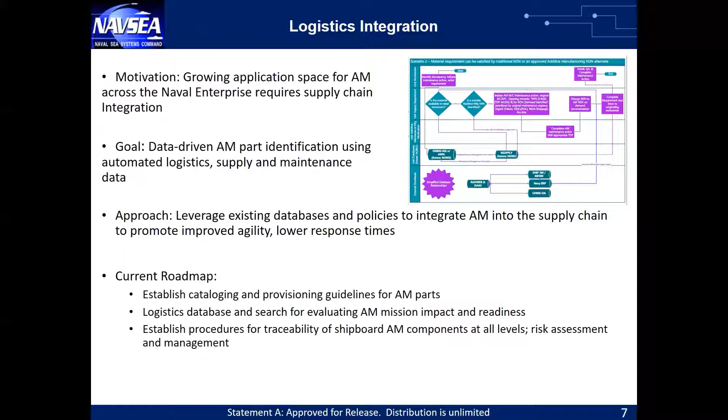So this is the engineer talking about logistics, which any logistician will tell you is dangerous. But we're really diving deep and working with the folks that we need, to make sure that we have what we need to get this—so that it's not just individual nodes, but we have a supply system that will now support additive manufacturing moving forward.

So this gives you essentially the synopsis of being able to manufacture this component repeatedly, regardless of where you're manufacturing it. So if it's being made at, for example, Keyport one day and Philadelphia the next, we have good trust that that component will be the same regardless of where they're manufacturing.

And depending on the criticality of the component, whether it's a green or a blue box, there are other requirements, notes, or quality control type pages and everything. These tech data packages do revolve around the ASTM requirements and Mil Standard 3100. So it's not out on its own—it's pulling in the specific things that we've been relying on for additive.

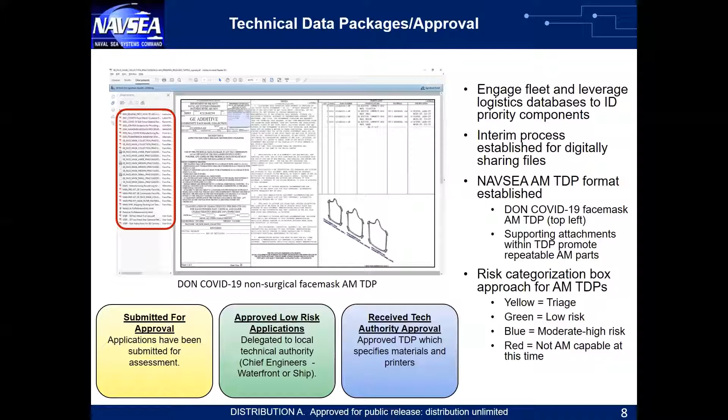And as I talked about with the digital aspect of this technology, being able to connect the equipment to our networks is really important—because otherwise what you end up doing is working from a machine that isn't allowed to hook up to the network, transferring the file onto a removable hard drive, a CD, or USB drive, sneakernetting it over to the machine, plugging it into the laptop that runs that machine, downloading it off that, and then trying to get it to the machine, right? So it's very inefficient.

Adds a lot of extra steps that we need to do there. So how do we get these computers and these additive machines hooked up to our networks?

What we've essentially established, and we're beginning to test out, is building a digital manufacturing enclave, where that enclave is where we put our authority to operate. That establishes the box we're allowed to plug into, and you get the authority to operate for that enclave. And then that enclave itself plugs into our Navy network.

This is an effort we're actively working on right now. We stood up a working group to help guide this between the various digital entities across NAVSEA. This is also one of the pieces as part of Hack the Machine that we're testing out, to see how secure this enclave is and what the potential issues with it are.

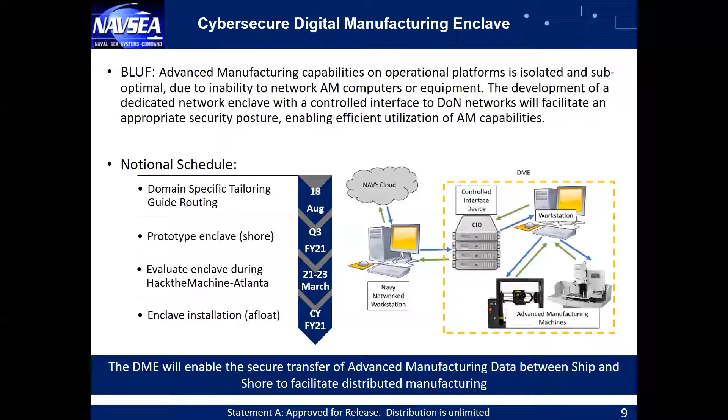So those past few slides gave an overarching, high level, 50,000 foot view of what we're working on in NAVSEA for additive manufacturing. This is to give you a thought process of the focus areas we're working on. I've been in this job for 5 years.

Honestly, we've had NSRP projects since almost the beginning that have been feeding into various aspects of how we do things, both on the panel project side and the RA side. Early on, we worked with HII and Newport News to develop a framework for using additive manufacturing. That helped feed into how we do tech pubs, how we scope and frame them out, bringing an industry perspective into how we were building our NAVSEA requirements. That was a partnership across a few NSRP yards.

The next area is robotic arc welding, the directed energy deposition. This was working with EWI and a bunch of the NSRP yards, and this initial project fed into a much larger RA project that's working through this year. This has allowed us an avenue to partner with NSRP and EWI and the performing shipyards to help prove out and find direct applications for our directed energy deposition tech pub. It gives us opportunities to try as we fly, as we're building these tech pubs, giving it some practice and work, and also gave us avenues to work directly with EWI to help develop some of these tech pubs as well.